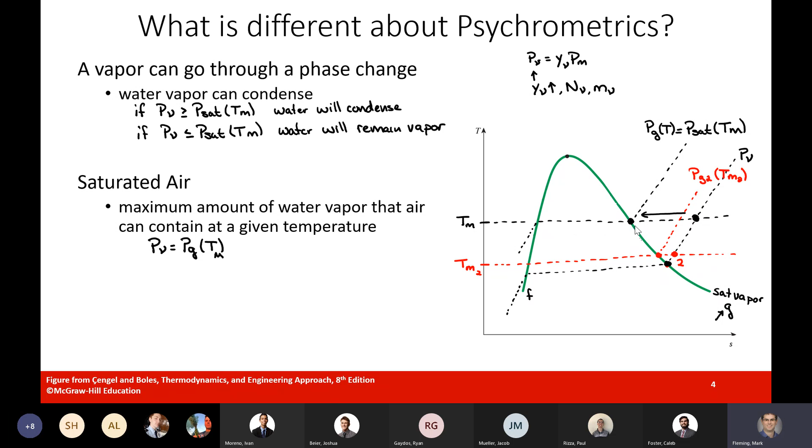The difference came from the fact that for psychrometrics, we have a vapor that could go through a phase change. So we were looking at water vapor that was outside the vapor dome, and we had to compare that to the saturation state. That's the big thing that's changing, and then we had to adjust some of our nomenclature for that reason.

We then introduced two new parameters for this. We first had the humidity ratio, which was the specific humidity. Again, this was a ratio of the mass of the vapor over the mass of the dry air, and that ended up coming out to this relation that we could use for air and water vapor.

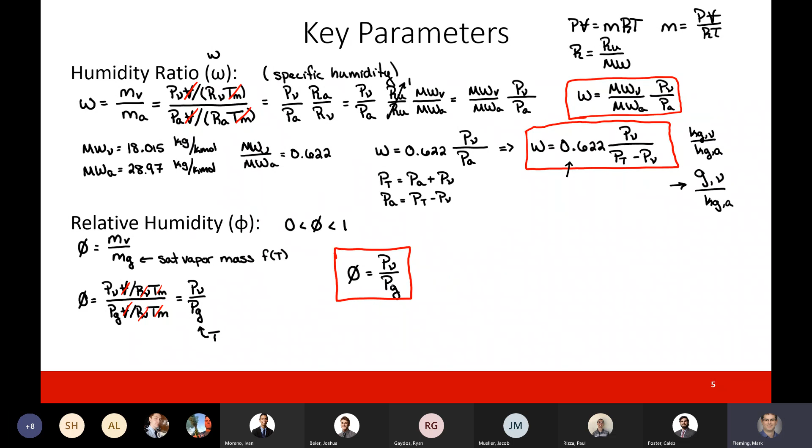We then also developed the relative humidity, and relative humidity was a comparison of the mass of the vapor over the mass of the vapor at the saturated state. We found that was just a ratio of the partial pressure of the vapor over the saturation pressure at the same temperature. So those were our key definitions that we used.

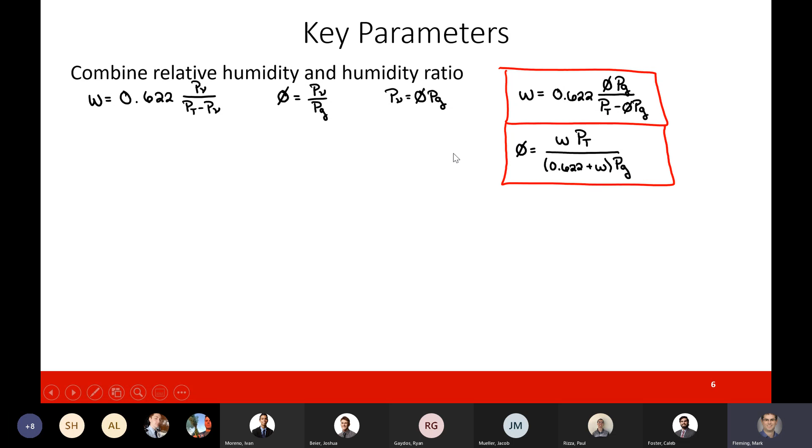We were able to put these together to see how, if we know our relative humidity, we can now use that to find our humidity ratio. If we know our humidity ratio, we can then use that to get our relative humidity. So that is where I think we left off, and we are now going to start talking about our key properties.

For key properties, we are going to mainly focus on the energy properties for right now. That is going to be enthalpy and internal energy. We're going to do our discussions first in terms of enthalpy, because it's a little easier to talk about. We're going to see that most of the applications we'll have for psychrometrics relate to open systems, because it's going to be like HVAC applications. So open systems means we're going to be dealing with enthalpy.

The first thing we want to talk about is the extensive form of enthalpy. Extensive, remember, capital letter, means additive, and that was one of the key things we noted in the gas mixture section. So if we want to talk about the enthalpy of this mixture, we're going to have the enthalpy of the dry air, and we're also going to have the enthalpy of the water vapor. We have both of those in the extensive form.

Now, in terms of getting this into intensive form, intensive is the per-mass basis. For air, we could say the mass of the air times the enthalpy in the specific form of the dry air, so M times small h of air. This is just the intensive form of this part, and we should note this is the mass of the dry air as well.

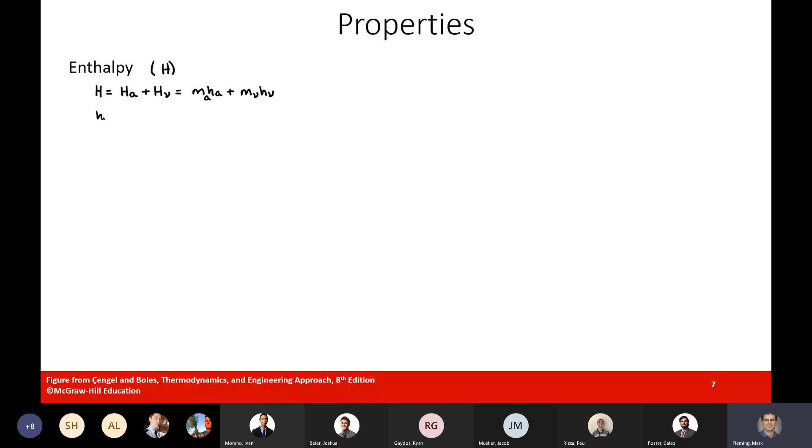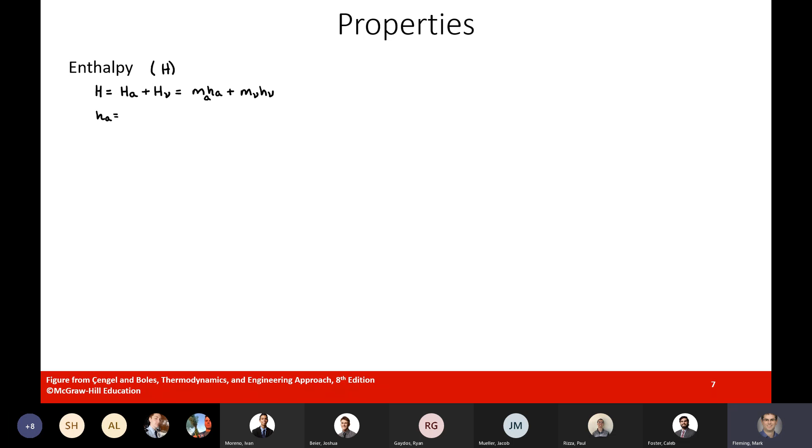For air, we know we have the enthalpy of the dry air. If we think back, we said air is an ideal gas. Being an ideal gas, it's probably going to be related to a specific heat for most HVAC applications. So H can be approximated by C sub P of air times the temperature, and this temperature is of the mixture. Again, this is just air being an ideal gas, so we can take advantage of the ideal gas law.

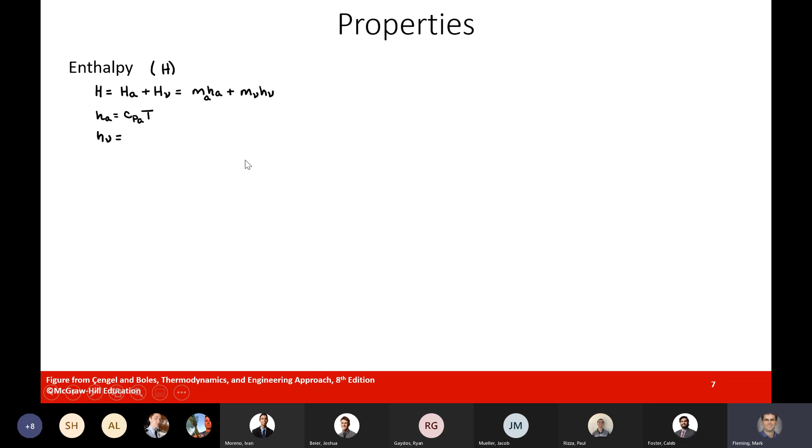Where it gets a little tricky is when we want to deal with the enthalpy of the water vapor. The answer to this is a bit tricky, and we have to visualize this process. So how do we visualize it?

If we go ahead and plot a T-S diagram, and plot some lines of constant enthalpy on it, and look at the vapor side, for most HVAC applications it's generally a low temperature. If we think about room temperature, 25 degrees Celsius, and plot this line, we get out to this enthalpy in the superheated region, because we have a low partial pressure, our point is going to be somewhere out here. We note that the lines of constant enthalpy are pretty much horizontal. So the enthalpy out here is basically the same as the enthalpy here at the saturation point.

The saturation point is H sub G, and this would be the saturated vapor state. Since these lines are mostly horizontal, that means we can go ahead and do our table lookup for H sub V at the saturation point — H sub G at the given temperature. So all we have to know is the temperature. We go to the saturation tables, to the vapor side, which is the G side of the table, and we can look it up. So basically we are assuming this is a saturated vapor, and that is the approach we're going to use.

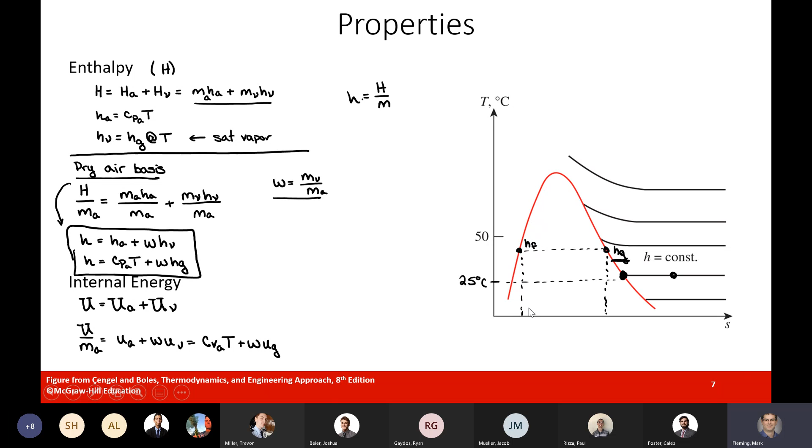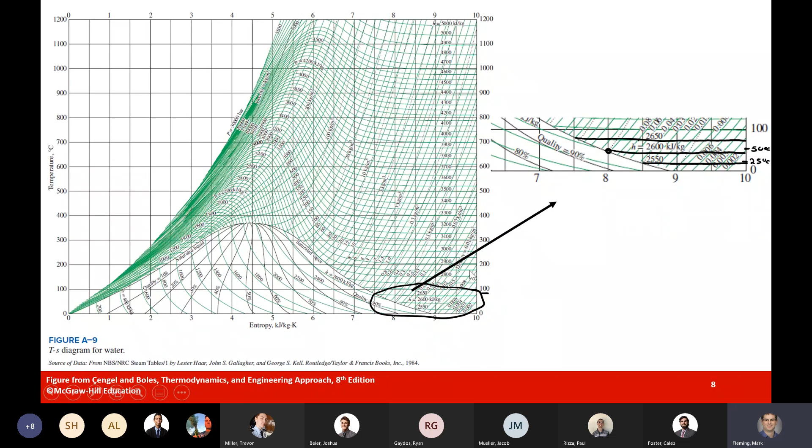Glad to make sure that's clear, because that's one of the more important things to remember when we deal with the psychrometric properties. Okay, so we already talked about the temperature, how we prove that the enthalpy is basically constant enough here that we can get away with that. So what we want to do now is move forward into our discussion of some of the key temperatures that we have for psychrometrics.

Now, psychrometrics is a little bit unique. In terms of temperatures, there are going to be three temperatures we need to talk about. This is going to be different from before. Up until now, there's been one temperature, whatever the thermodynamic temperature of our system was. That's the only temperature we knew. When we got to gas mixtures, we added a little caveat: whenever we dealt with Dalton's law or Amagat's law, we said we were dealing with the same temperature for the mixture, so we could call it the mixture temperature, and each individual component gas generally had to have that same temperature. Now we're continuing that assumption, so that does not change.

What changes is how we define certain temperatures. These are more definitions, and they'll tell us something important about what's going on in terms of the vapor and whether or not we have some sort of phase change that we really need to be considering. Some of this temperature nomenclature does get a little bit confusing, so I want to spend time talking about what these main temperatures are and why we care about them. We're going to spend a little time on definitions, and then look at a T-S diagram to visualize the difference in the temperatures.

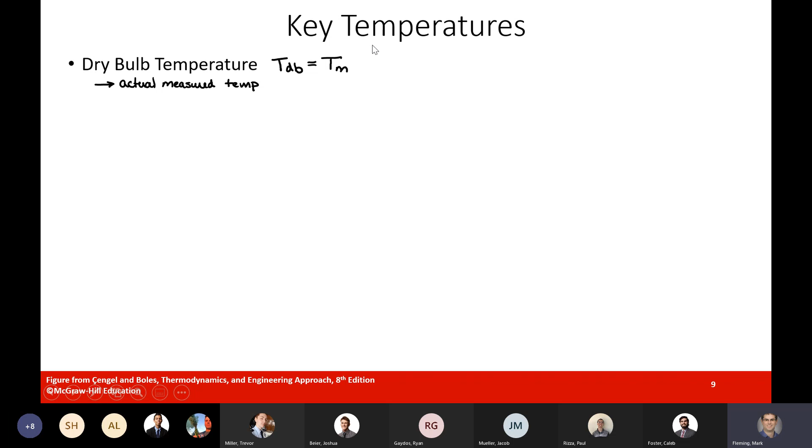So if we want to take a look at a T-S diagram, let's draw a state point somewhere out here. We'll go ahead and add that in. But if we wanted to first just label this, maybe it'd be easier to do this: so we have the dry bulb temperature. We can go ahead and add a horizontal line in.

And what we find is the dry bulb temperature - well, this is where our point is going to be, so this is our actual state point. We see that we just drew a horizontal line, that is the dry bulb temperature. We could also call this the temperature of the mixture - same kind of setup that we saw earlier when we dealt with that mixture temperature setup. So again, it's just a slight change in nomenclature.

Now what we need to do is add in some lines of constant pressure here, so I'm going to do those in red. So we had our line of constant pressure here, and just to make sure I don't mess this up, I'm going to try to do it this way - so we had our line of constant pressure that goes through that point, and this was the partial pressure of the water vapor.

And this was the saturation pressure at the given temperature. So now instead of being at the mixture temperature, we could say that this is going to be at the dry bulb temp, or the dry bulb temperature - T dry bulb. So all we did is we've now just redefined what temperature. We said okay, it's now the dry bulb temperature that we find P sub G at, but P sub G stays the same in terms of its definition. And now we still have our partial pressure of the water vapor. So this looks fairly similar to the diagram that we had a few days ago, or Monday.

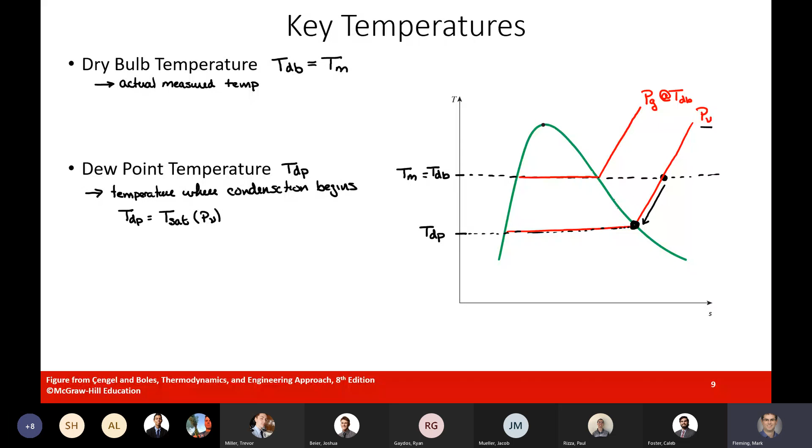Okay, that is the second of our three temperatures, which means we have one more to go. This temperature is probably the most confusing of all, the one that will give everyone the most trouble, and it also has a few different ways to define it. Generally we call this the wet bulb temperature, though from a pure thermodynamic sense, this is the adiabatic saturation temperature, or T adiabatic saturation. We'll eventually make the substitution and talk about why we can call this the wet bulb temperature, but we'll have to do a bit of mathematics to prove it.

Now, what is the adiabatic saturation temperature? Simply put, if we have some water and air in a tank and the air is not fully saturated with water, we put it in a perfectly insulated box, and let some of the water evaporate into the air until we reach the saturation condition.

But we can only pull energy out of the air to cause the phase change of the water. So if the air has to provide energy for the water to vaporize, the temperature of the air is going to drop. If we do this adiabatically, so all that energy comes from the air, we would end up moving to a point right here. Once we reach the 100% saturated condition, that is what we'll call the adiabatic saturation point, or adiabatic saturation.

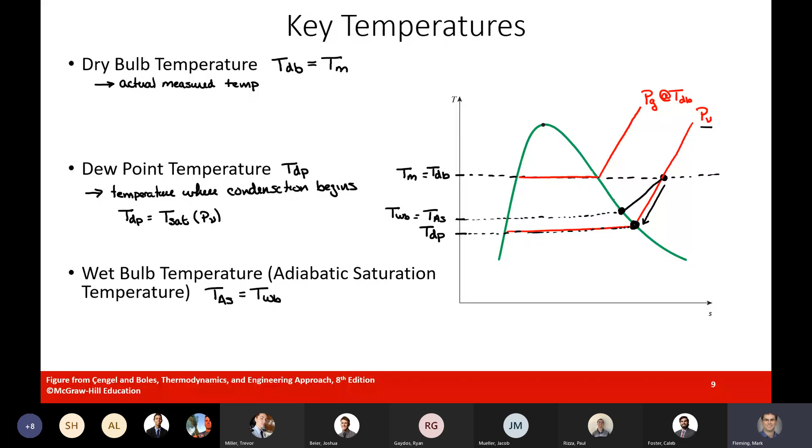We can also substitute this as basically what we call the wet bulb temperature. We'll get into why we call it the wet bulb temperature in a little bit. This does have some important parameters, but before we can talk about why this is important and what processes these would be important for, we have to figure out what it is, how it's defined, and how historically this temperature has been used. That's what the next few slides are about.

So what we want to do is figure out how to model the wet bulb temperature, and maybe do our first approach at putting some psychrometric terms into use.

Now, the key concept is we're going to have air that's got a little bit of water vapor in it, but it's not going to be saturated. So we have a relative humidity that's below 100%, and that's going to come into this tank.

Now this tank's going to have some liquid water at the bottom, and we're going to blow the air that hasn't been fully saturated over it. It's going to be a really long tank, and we'll assume it's long enough that we get enough water to evaporate into the air so that it leaves at the saturated condition.

Now, saturated condition means we have 100% relative humidity. We can't take any more water on in this air, so it's fully saturated, and we're going to have that leave at state 2.

What we'll model this as is we'll just put a little bit of water in, so we maintain a constant water level. So we'll have some water being added into this system.

To do this, we're going to have to apply our conservation of mass and conservation of energy, and we'll see how we can define this concept.

Now, the concept that we want is to figure out what is T2, because T2 is the process where we've had this insulated tank. We should note there's no heat transfer out of this tank, so it's adiabatic, and we are going to get it to the saturated condition. So T2 represents the adiabatic saturation temperature.

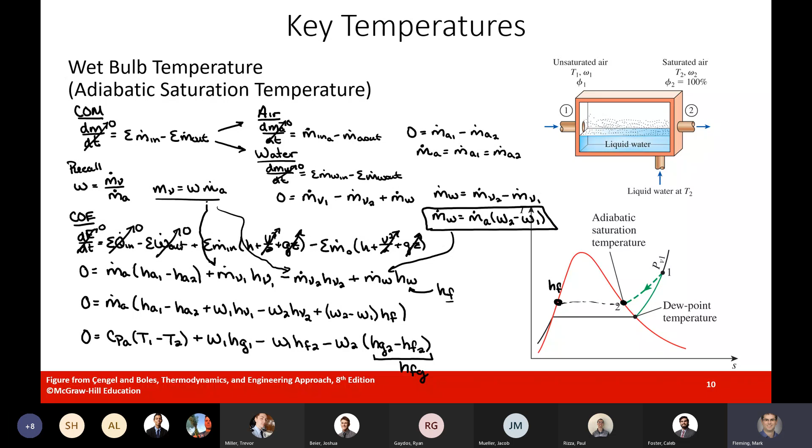Now why is this going to be important? We're going to move to the next slide to reset things, and we're going to rearrange some terms, just finishing up where we left off.

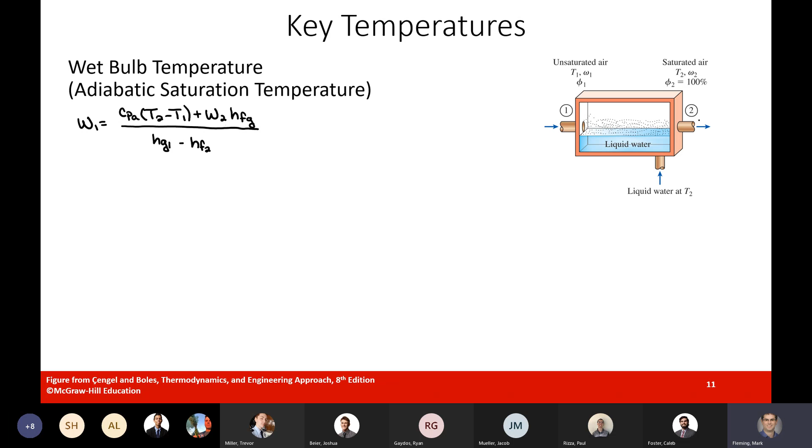What we'll find is if we solve for the humidity ratio at 1, we'll have C sub P of the air times the temperature at state 2 minus the temperature at state 1, plus the humidity ratio at state 2 times H sub Fg, our phase change at the given temperature, divided by H sub G at state 1 minus H sub F at state 2. State 2 just means it's a function of temperature at 2. Now recall relative humidity at state 2 is 100%, since state 2 is saturated.

So if state 2 is saturated, that means the relative humidity is equal to 100%. And if it's equal to 100%, that means the humidity ratio equals 0.622 times P sub G at temperature 2, divided by P minus P sub G at temperature 2.

Now why is that important? Well, if we make this substitution, we're going to see the humidity ratio at state 2 relate to the saturation condition. That's only going to be a function of temperature 2, because the pressure of the saturation condition is a function of that temperature. We look at H sub Fg, this is again at state 2, so this is a function of T2.

This is a function of T2. This is a function of T1. And C sub P delta T, that's a function of T1 and T2. So what we really just wrote out is the humidity ratio at state 1, which is a function of T1 and T2.

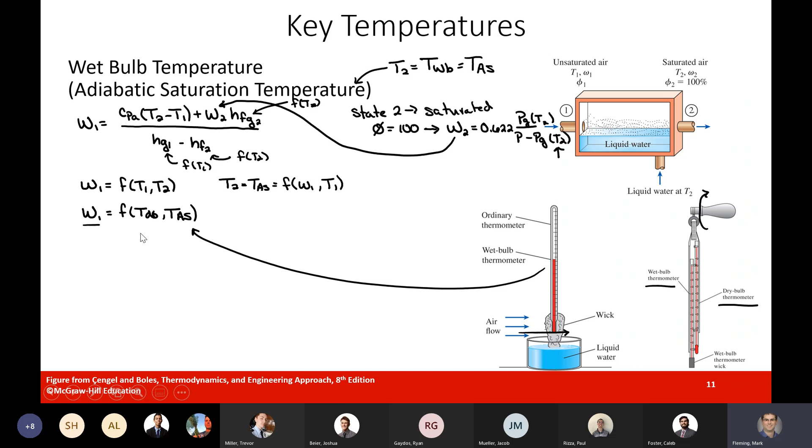We are able to then read two temperatures, a dry bulb and a wet bulb temperature, and we can now make that calculation. So this is historically why the wet bulb temperature is very important. It's going to help us calculate things. Next week, we'll talk about a chart that's going to be very helpful and useful for that purpose. This is why this setup is important.

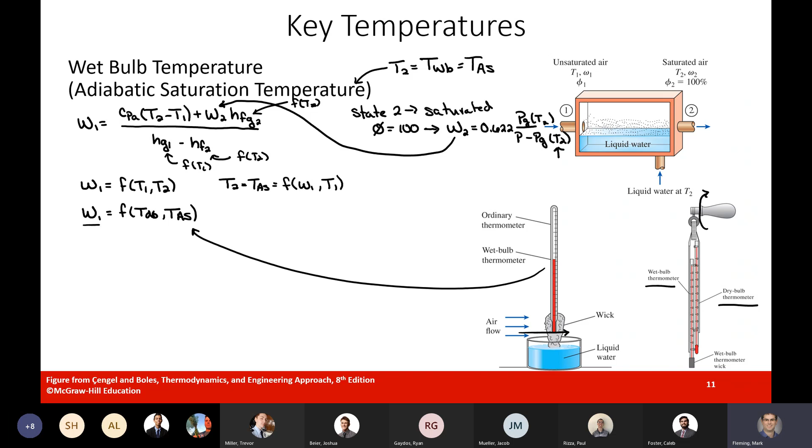Before we do that, I want to talk about what these temperatures relate to. Dew point temperature is going to relate to condensation, and condensation is important in terms of equipment design. If you don't want water to develop on your equipment, like a cryogenic pump or something like that, you don't want water to get on that. It could damage it. So that's where you're going to pay attention to the dew point temperature.

It's also important if you're manufacturing any sort of electronics. You have to keep your air temperature for that manufacture above the dew point. Otherwise, you might have water droplets that condensate onto your small electronics manufacture and basically destroy the electronics you were making. It's also important if you have to worry about something warming up.

An example of something warming up is if you take a soda can out of the refrigerator. The water that you see on there forms because the air right in contact with your can is going to drop below the dew point temperature. Water will come out of the air and condense onto your can, and that will also warm up your can during that process. So that is some comment on the dew point temperature.

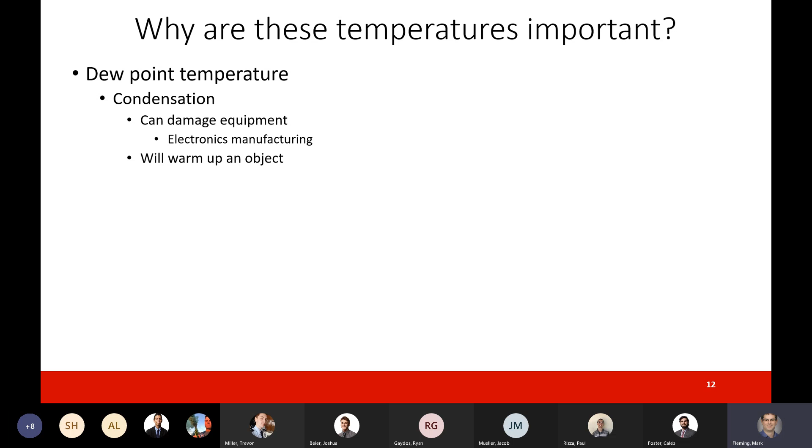Now, the last thing I wanted to comment on was the wet bulb temperature, because this is the new one that seems a little bit weird. In terms of its use, it's going to be very useful if we have to do cooling tower analysis.

If you do a wet cooling tower analysis, similar to what we saw in the lab in week 2 when we did the chiller, we would be focused on the wet bulb temperature because you have air coming in, you have some water, and it probably is going to leave at a saturated case. So you can only put as much water and get so much heat rejected by that phase change from the air coming across. You're limited by the wet bulb temperature for that type of heat exchanger design.

It's also very important in terms of humans. When we sweat, it's important to know what the wet bulb temperature is, because if we have a very high humidity case and it's very warm outside, our sweating is not as effective at cooling us off as if it was a low humidity case. So that is another case where wet bulb temperature matters.

The last thing we'll note is kind of the history, and this is done using the psychrometric chart. We'll talk about this in about a lecture and a half when we actually get into the psychrometric chart, and we'll see how the wet bulb temperature plays a role in that.

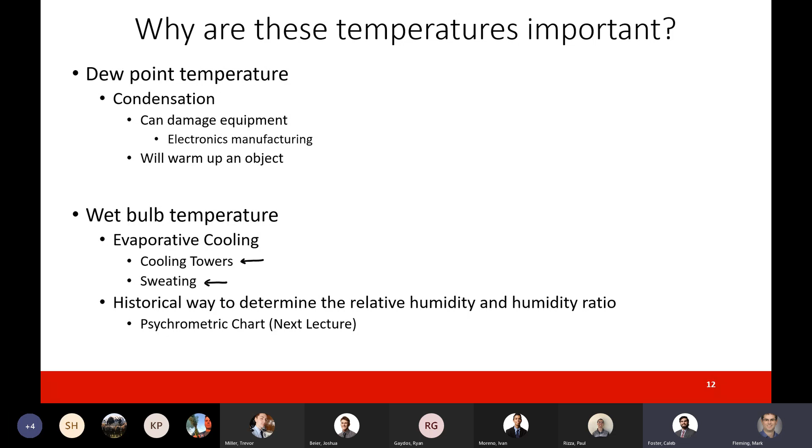Thank you. You too. Thank you. Have a good one. Thanks. You guys too.